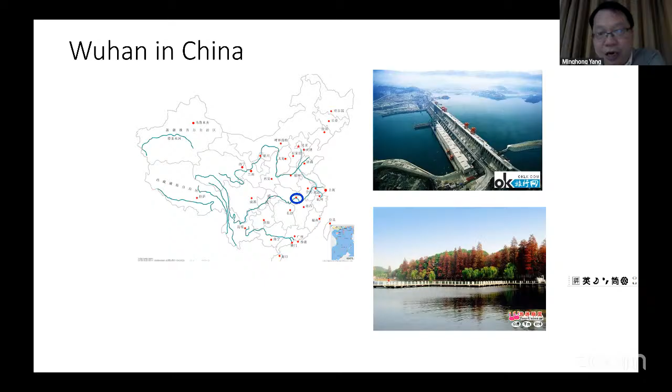Our province is home to the very famous Three Gorges Dam, and we also have a nice inner-city lake in our city.

This image shows where we are in Wuhan, and this building houses the National Engineering Research Center for Fiber Optical Sensing Technology. We are one of the National Engineering Research Centers in China researching fiber optic sensing technology, especially developing systems for fiber sensing applications such as safety monitoring for bridges, tunnels, and underground structures.

In our institution, we currently have 56 faculty members and about 200 master's and PhD students.

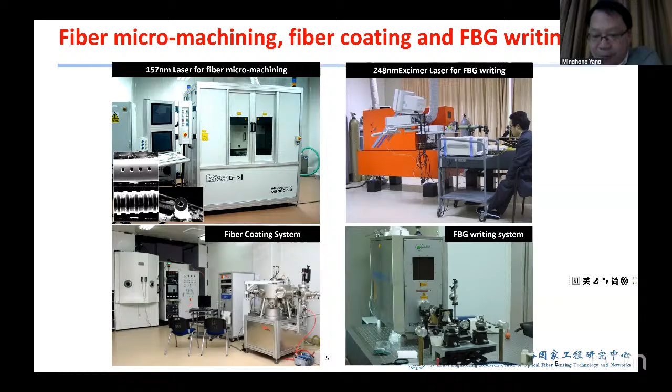These are some of our facilities. We can perform traditional fiber micromachining and have a fiber excimer laser for FBG writing, plus specially designed fiber coating systems and fiber FBG writing systems. We also have spectroscopy equipment, and especially a fiber draw tower which can be used for continuously writing FBG arrays during the fiber drawing process.

In our laboratory, we develop everything from the very beginning—sensing principles, sensing sensitive materials, and key devices—through to sensing networks, with special focus on industrial engineering. We provide so-called turnkey solutions for industry partners.

In the second part, I will talk about the draw tower fiber grating. First, I want to show some background. Everybody should know that FBG technology is widely employed in many industrial applications.

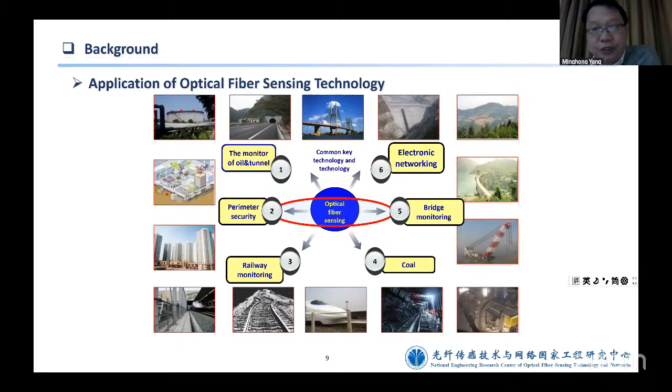For example, for oil tunnels, and also for railway and coal mine, bridge, electrical networking, and so on—many applications. But nowadays, for distributed technology, we mostly use scattering technology, for example Rayleigh scattering, Brillouin scattering, and Raman scattering for temperature measurements.

So for such distribution measurement, we have much more distributed measurements along the fiber. You don't need to make the sensors—the fiber itself is a sensor.

For such scattering technology, we know it has a very weak signal, somehow a very slow response time, and since the signal is weak, a low signal-to-noise ratio. Therefore you have very low precision and limited networking parameters.

Another technology is based on wavelength division multiplexing, the so-called FBG technology. FBG technology has a very strong signal and also fast response, which can be used to generate networking for multiple parameters, for example strain, temperature, and relative humidity. Many parameters can be monitored with the FBG platform.

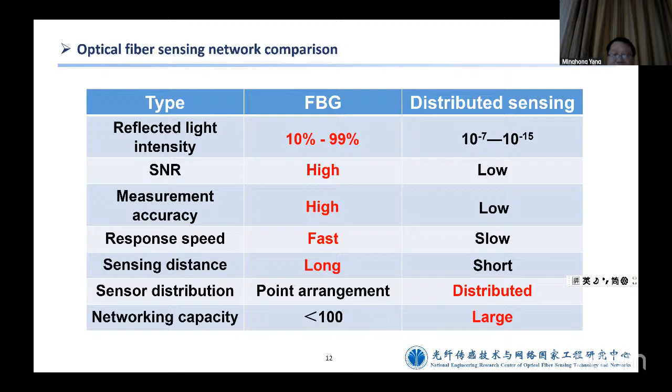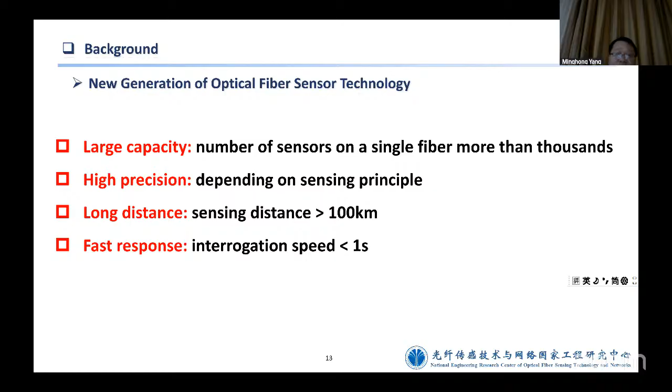So in industry we need very large capacity with high precision, long distance, and fast response. How can one achieve that in one system?

As I mentioned before, for traditional FBG technology you need to strip the protecting layer, then use an excimer laser to write the FBG, and then recoat it, which is really time consuming and not suited for large capacity over long distances, with limited mechanical properties and lower reliability.

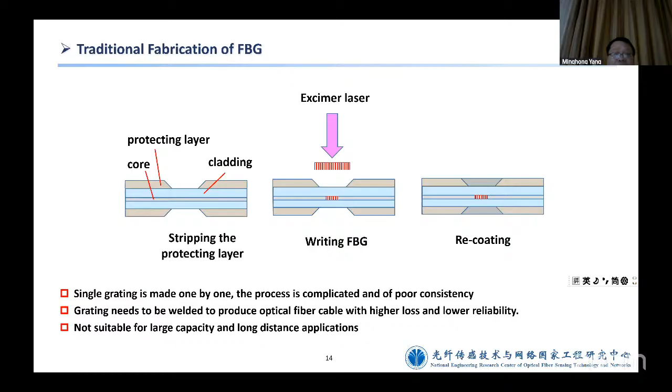So in our laboratory, we are trying to combine these two technologies in one system—meaning we can write weak FBGs during the fiber drawing process. Normally the reflectivity is 10 to the power of minus 4, which means we can make continuous FBGs.

Normally we can make more than 10,000 FBGs during the fiber drawing process. Since each FBG is very weak, we have very low transmission power loss, and there's no splicing point along the fiber, which means it's mechanically robust. We can combine distributed and wavelength-multiplexing technology in one system.

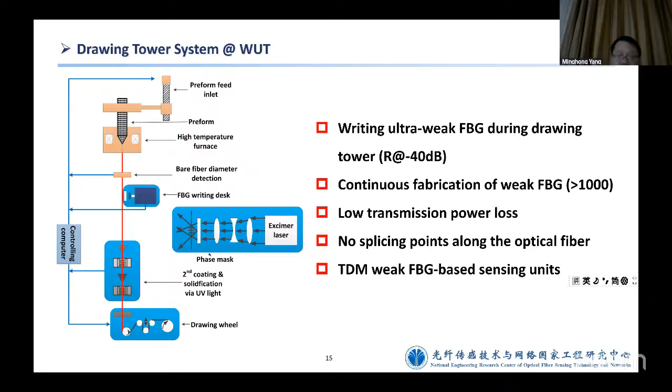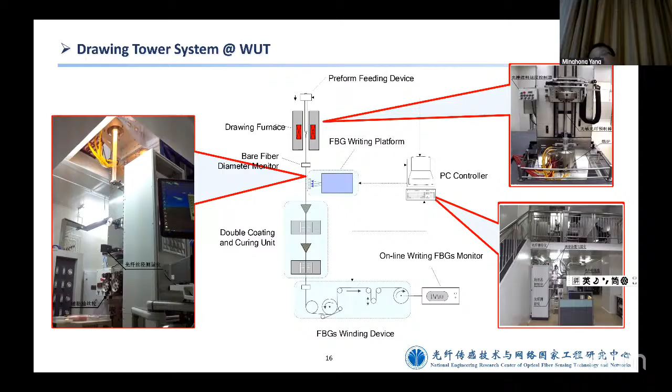The challenge is that the idea is simple: we have a drawing tower, and during the draw, we use an excimer laser to write FBGs during the fiber drawing process. But the challenge is how to make it work in practice, especially for very large capacity with industrial production.

There are two technologies. First is the Talbot interferometer, which is based on two paths interfering to write the fiber gratings. This is very tricky—you have to control the path distance exactly, which is very challenging.

Another technology is based on a phase mask. Using a phase mask, you can make FBGs. But the challenge for drawing-tower FBGs is that the fiber itself is moving.

It's not static, which means you have to do the exposure in just one shot—just one excimer exposure—since the fiber is moving.

And because the fiber is moving, you have to keep the whole system very stable. The challenge is also that since the fiber is moving, there's a kind of vibration. If vibration exists, you can't make very good FBG arrays, and different FBGs will have different tolerances—the central wavelength won't be exactly the same, which could be problematic for real applications.

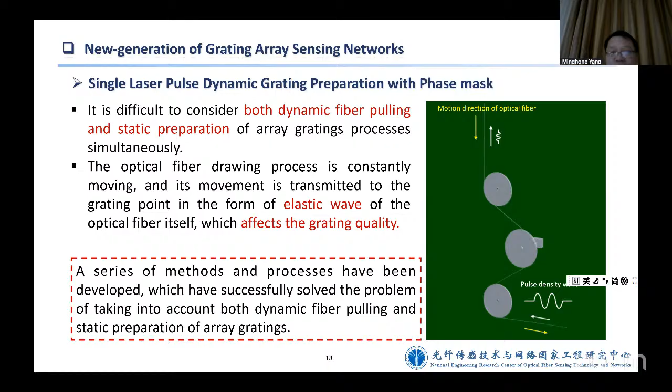This is just a composition of the system.

I showed you before the traditional dynamic preparation of the gratings, which gives a very different FBG array, not good enough for real applications. Later on, we were able to make industrialized dynamic preparation gratings with very good consistency and repeatability for large capacity arrays, with wavelength consistency normally less than 0.1 nm.

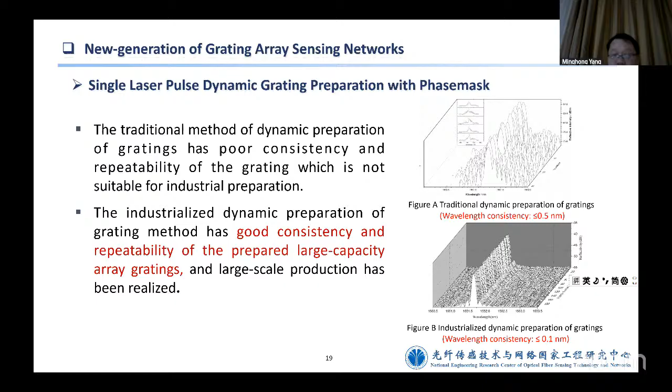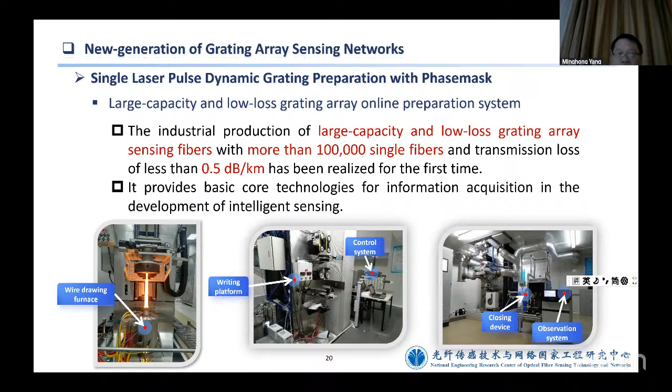This is because it's a single laser pulse dynamic grating preparation, and since it's single pulse, the energy is limited, so we can make a very weak FBG. The intensity of the FBG can also be tuned based on the application requirements, and the total transmission loss can be less than 0.5 dB per kilometer, which is good enough for industry applications.

So the third part is about the FBG arrays we made at our institution. We can make such FBG arrays, but cabling is also very challenging. We are able to make different cable systems, for example temperature sensing cable, vibration sensing cable, and strain sensing cable, based on our built-in prestressing force technology and vibration response sensitization technology, as well as moisture-sensitive material coating technology for moisture measurements.

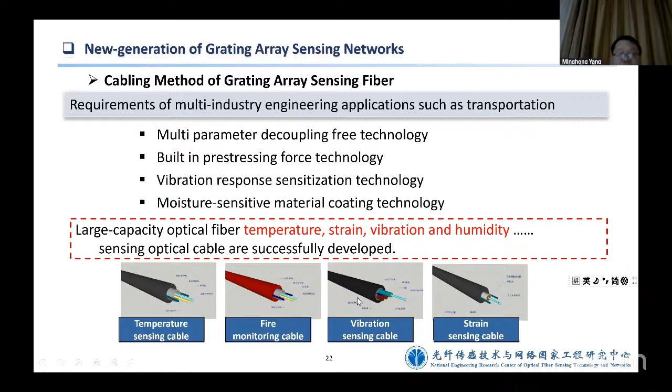That means in different areas we can use different wavelengths, and we can also use the same wavelengths in different areas. Both approaches are possible for us.

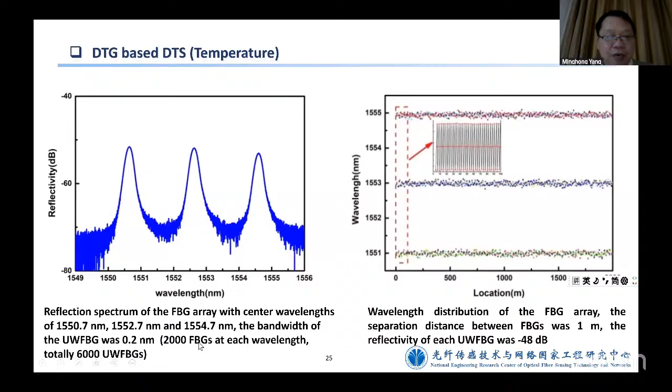This screen shows distributed temperature sensing with 6,000 FBG arrays across three different central wavelengths. This is one 2,000 FBG array, another 2,000 FBG array, and another 2,000 FBG array, totaling 6,000 FBGs, where each point means one FBG. We can make such FBG arrays just in one cable, and this is a demonstration of temperature measurement.

Such a cable can be embedded with different materials for real industry applications. For example, this is one case for OPGW cable applications.

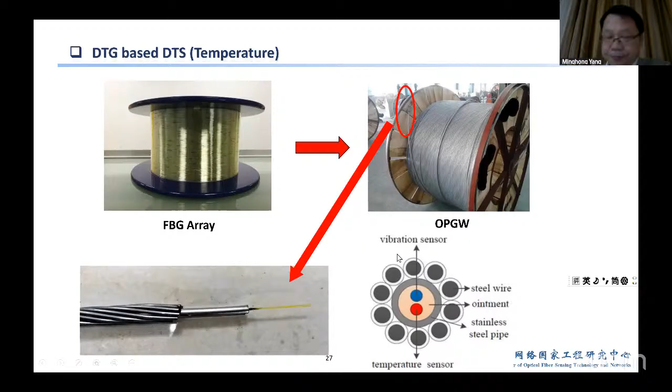This is another field demonstration for temperature measurement, using an oil field test for downhole temperature measurements. As you can see, the temperature increases as the position goes further down the downhole.

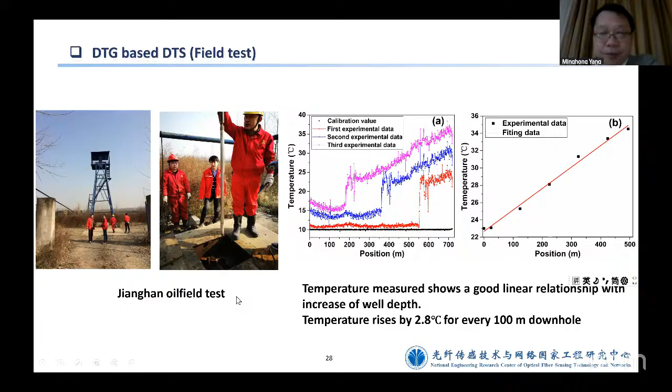Can you hear me now? We can hear you, yeah. If you share the slides again, sorry. No problem, just now it's already okay, I'll continue. Can you see my shared screen, right? Not yet, it's still loading I think. Okay, moment. I think it looks okay now. Yeah, we can see your slides. Please go ahead. You can see, okay, I'll go ahead. So, you can see my screen, right? Okay, yeah, we can, yep.

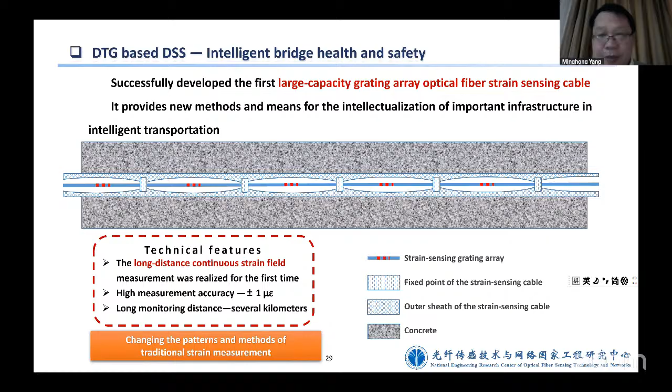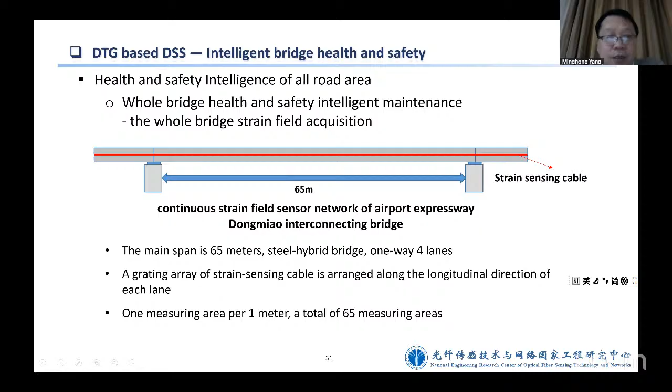This is a demonstration of such a cable for intelligent bridge health monitoring. We have a local bridge in our city with a span of 65 meters, and we installed the strain fiber on the bridge. With every FBG, we can measure the strain deformation under different truck loading.

For example, if the truck loading is 18 tons and 48 tons, we can measure the resulting strain deformation, or stress, with our distributed strain cable system.

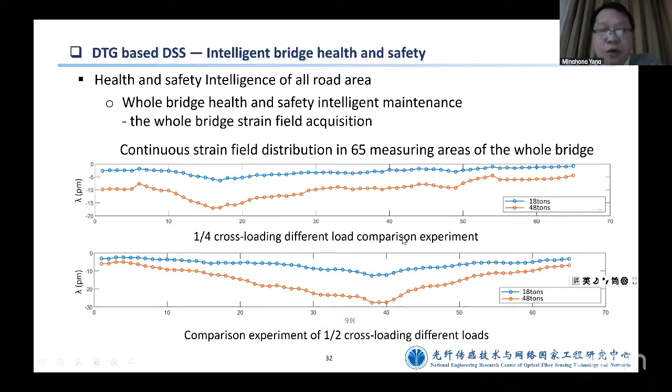With this technology, it's possible to monitor the bridge's strain and health deformation for real applications. This is our local bridge, which is already installed with this distributed strain cable for sensing and health monitoring.

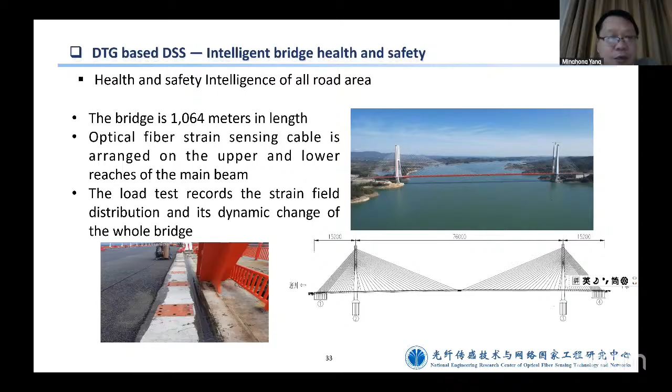Especially, this shows the different truck loads, as you can see here.

This is the location of the truck with a different area, especially for newly built bridges, for the static loading test. In such cases, we can test the train bridge deformation with different loading and simulate and test its healthy status, especially compared with the design.

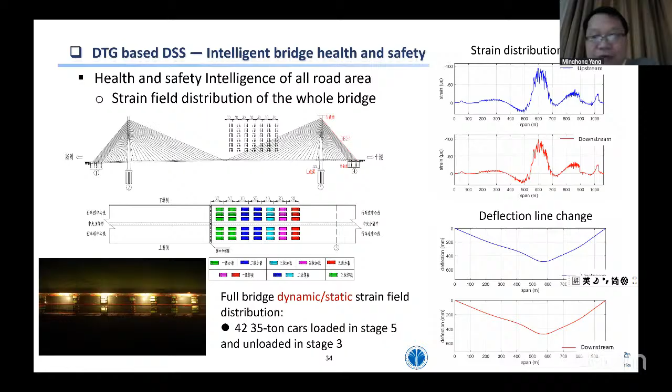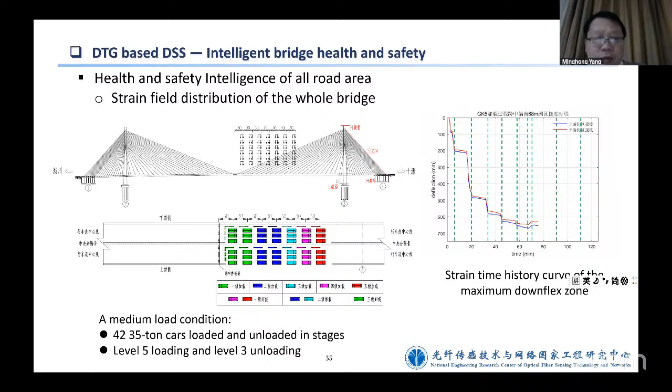This is also the image of the strain measurement during the strain and during different times, with the curvature of the deformation of the train, the bridge under different loadings. Especially, we can record the history deformation.

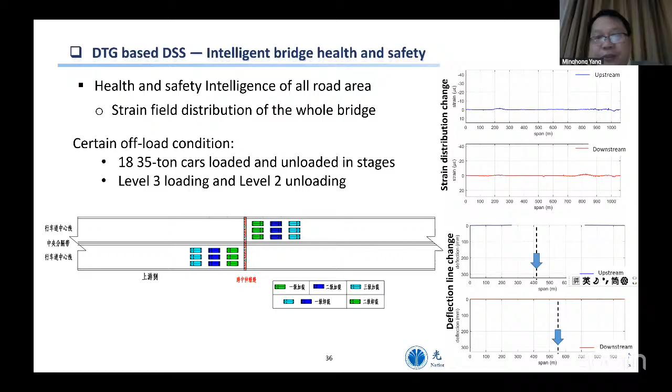With such intelligent big data, we can get the history deformation of the bridge, and then we can tell what happens in the bridge, especially for long-term health situation monitoring. The third part is the distributed acoustic sensing.

That means we can monitor distributed vibration or acoustic sensing, based on the so-called FBG, Fabry-Perot technology. As you see, one can make FBG arrays, and with two FBGs, we generate a so-called Fabry-Perot structure. The Fabry-Perot structure, the length, the void...

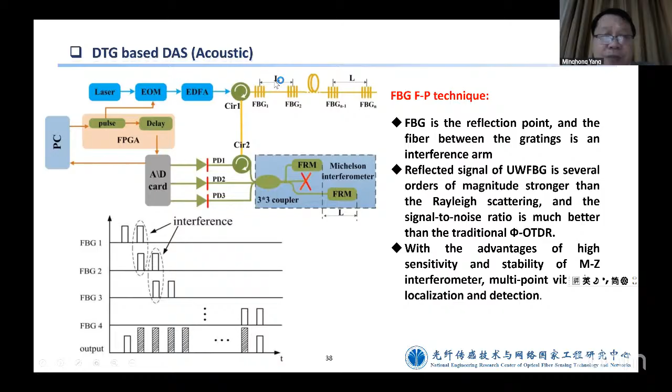It seems like he has internet issues. Let's see, he'll come back again.

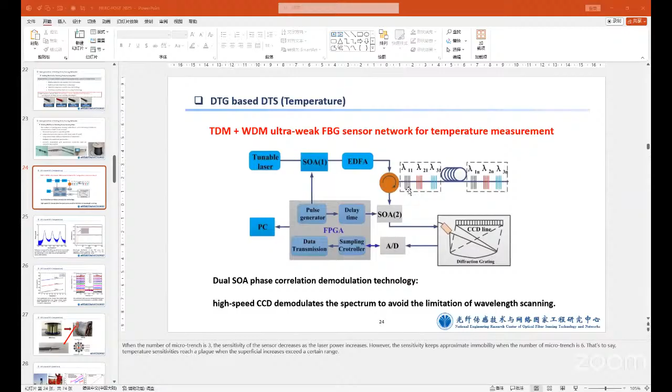I think I already talked about the distributed acoustic sensing problem, this slide. So I will continue. One moment. Okay.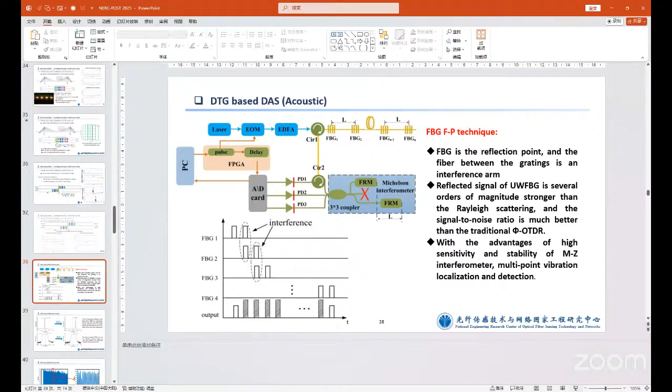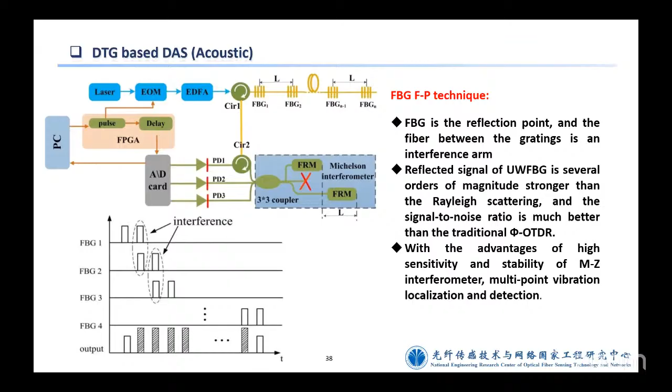So the so-called distributed acoustic sensing is based on the FBG, based on the Fabry-Perot structure. The Fabry-Perot structure is phase sensitive, so we measure the distributed phase shift, and then we get the acoustic signal.

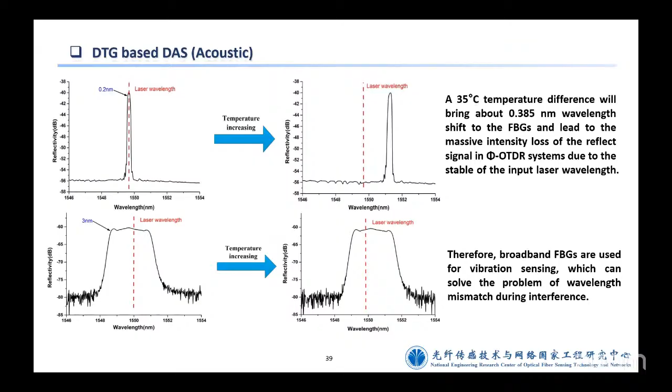Such technology can be used for smart metro, meaning you can monitor the discrete acoustic waves, and then with intelligent processing of big data, get information such as identification and location of illegal operations, damping assessment, and geological change, and so on.

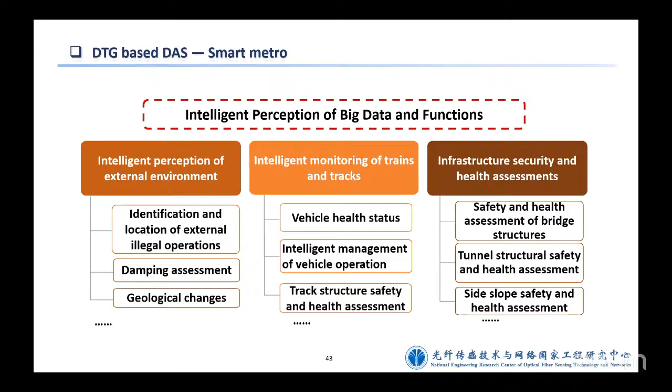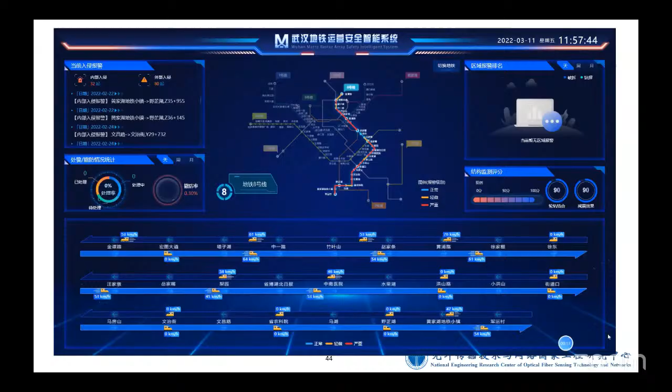This is a real application of our technology for the Wuhan Metro underground monitoring system, for safety intelligence system monitoring. Especially since the cable is installed along the track, we can get different noise and FBG signals.

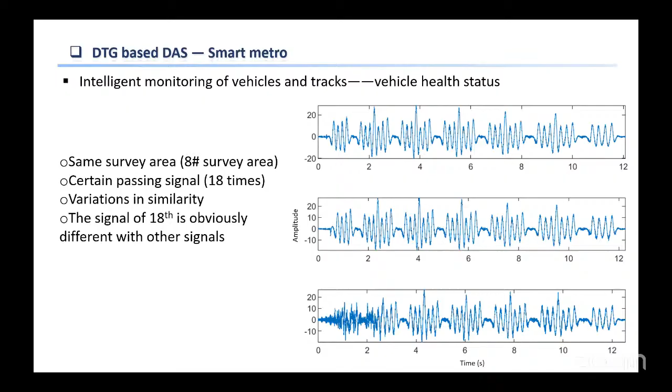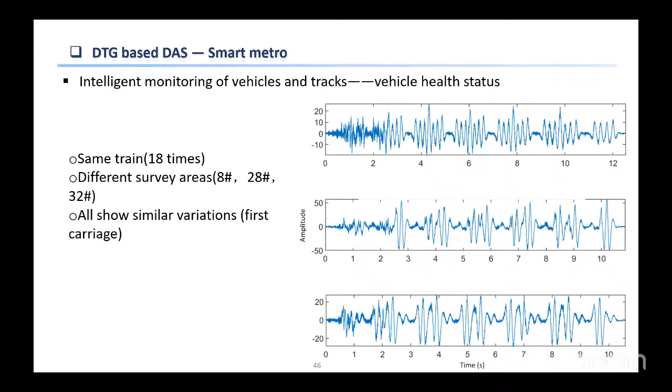We get peaks during the subway's movement, and then we can monitor and get information for monitoring the vehicles and tracks, so we can know the health status of the vehicle and also the tracks.

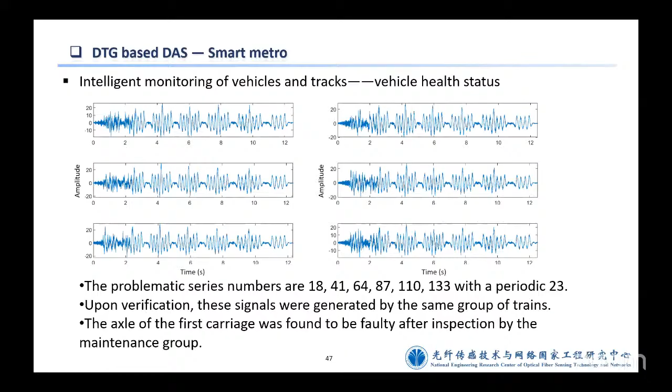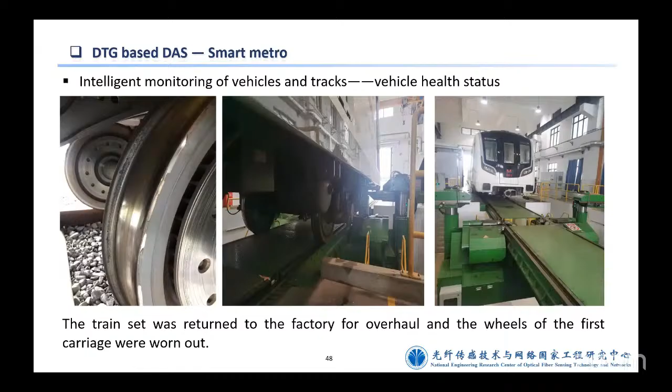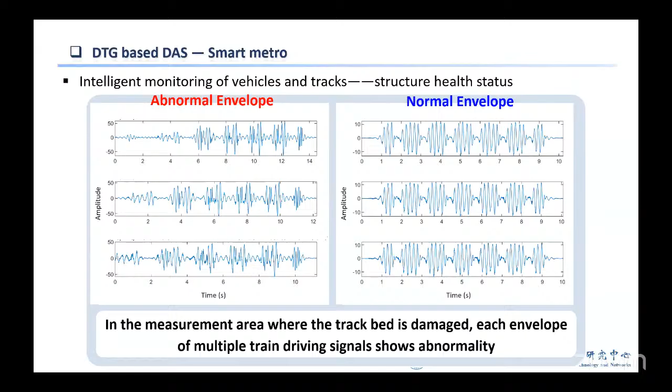This is another example for intelligent metro vehicle monitoring, based on the so-called envelope. With a typical normal envelope, you get a very uniform curve or spectrum, but with an abnormal envelope, you have different information.

With such information, one can determine what happens, identifying the abnormal point and also the abnormal events that happen for the subway.

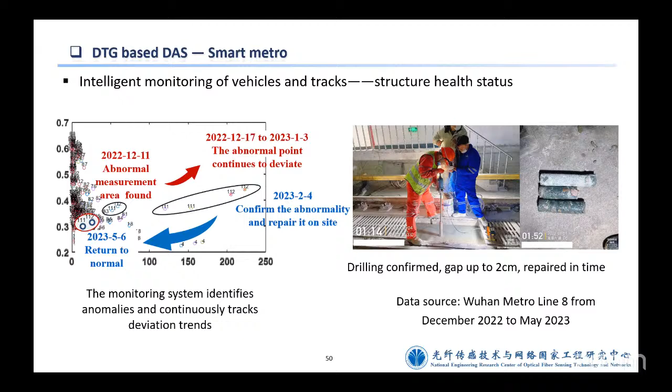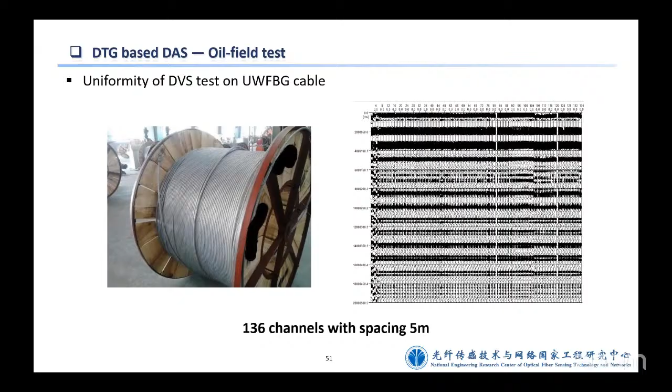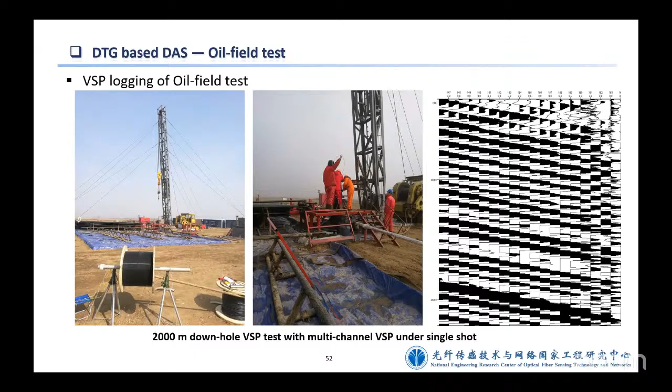We can also use such technology for hydraulic fracture monitoring for oil production. That means if water goes inside the rocks, we use fracture monitoring to find out what happens in the production.

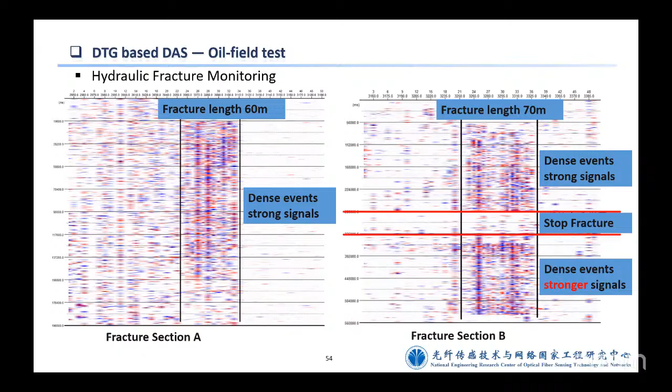For example, for the fracture, with a very dense structure, we get strong signals. Without fracture, the signal is weak. The event is proportional to the fracture production, so in this way, for oil production, we can get information about what happens, especially for the fracturing process.

Another technology is based on distributed matrix sensing processing. We can use so-called multiplex sensing with FBG arrays for temperature, strain, and vibration in just one fiber system. The technology here is based on FBG. FBG itself measures temperature or strain, and between two FBGs, we use vibration measurement, for example for acoustic sensing.

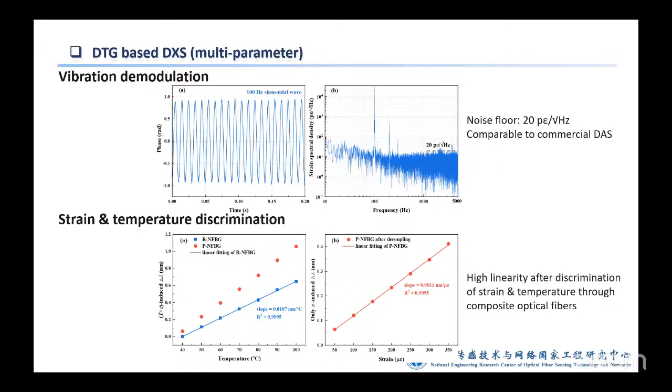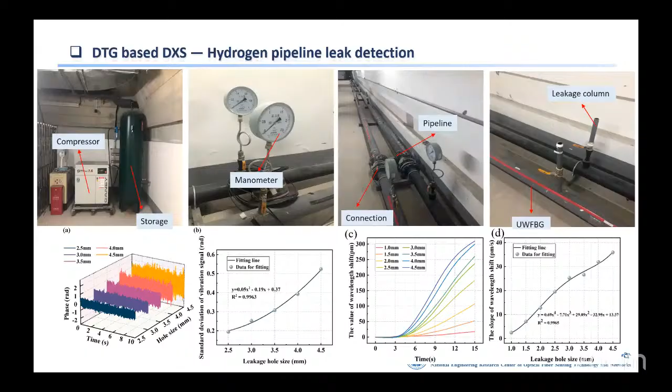This is a demonstration of our distributed optic sensing for hydrogen pipeline leakage detection. We can install the fiber along the pipeline and monitor temperature change, strain change, and vibration measurements to get the information we need.

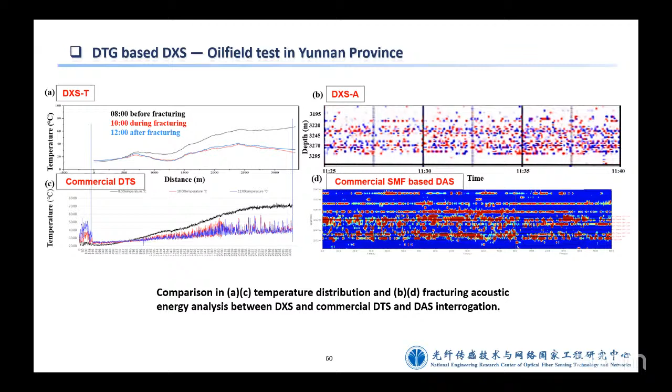Especially with this technology, we can do distributed temperature sensing and distributed acoustic sensing in just one system, with the capacity to measure strain and temperature in one system. Conventional distributed sensing, acoustic sensing, or temperature sensing are based on two different systems.

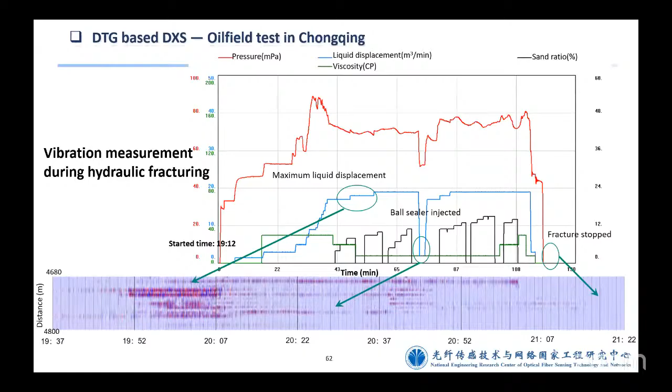This is also for downhole acoustic sensing, for an oil field test somewhere in China, for vibration during the fracture production process. This kind of system can also be used for monitoring temperature during the fracturing process.

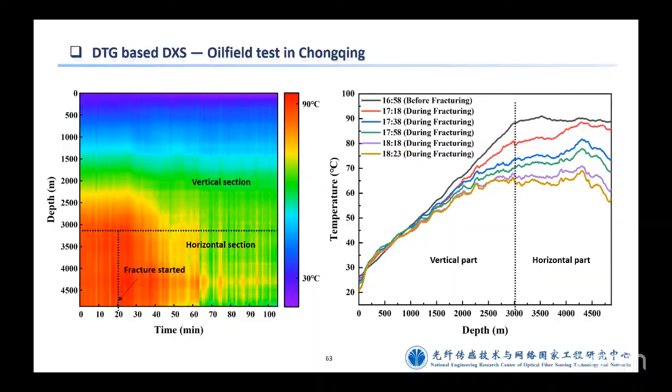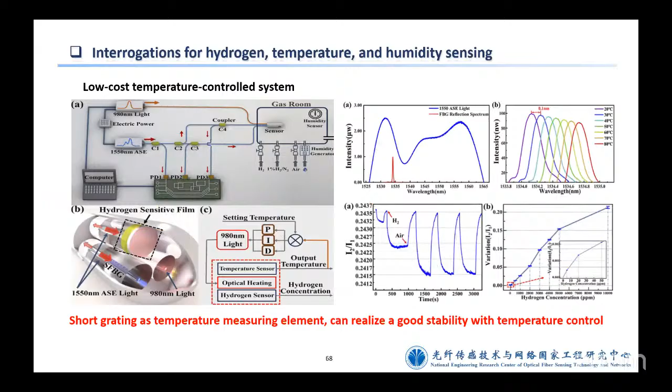This is one of our systems for dual-pass hydrogen and temperature measurement. We can measure temperature using, for example, a balanced or compensated hydrogen measurement system, which can be very precise for temperature measurements. We can measure from ppm to tenths of ppm for hydrogen measurements.

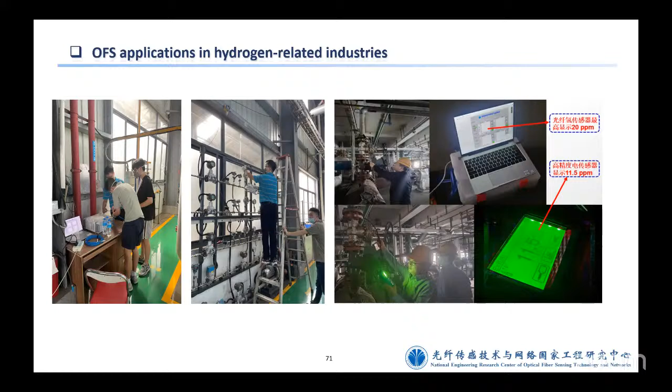We are also able to measure temperature and humidity with this sensing component and system for different real applications. This is one of our demonstration measurement systems for hydrogen, for our laptop system. This technology is also widely used in industrial applications, for example in coal mine industries, and for hydrogen combustion.

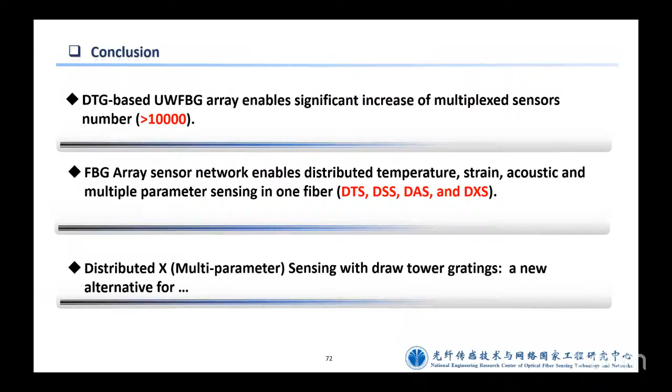So to conclude my talk: draw tower technology with FBG arrays enables a significant increase in multiple sensing, with numbers more than 10,000. FBG array sensing technology enables distributed temperature sensing, strain sensing, acoustic sensing, and even multiple parameter sensing in just one fiber. Distributed X sensing with draw tower technology would be a new alternative for the future. Thank you for your attention.